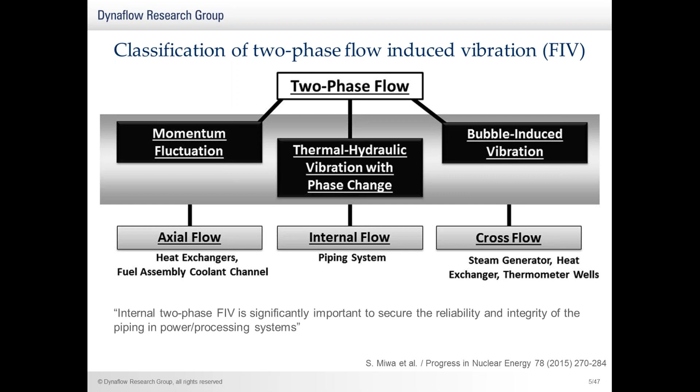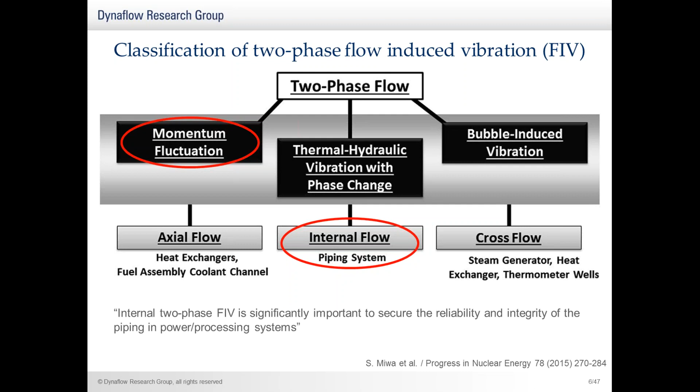process piping systems. Now for the remainder of this presentation, I will focus on these two classes, so momentum fluctuations inside a pipe. That is also, I think, for which we do most of our related projects, but definitely the ones that will be discussed in this webinar. So the remaining content of this webinar is divided in 4 categories. So general characteristics, which is next. Then I will discuss some engineering approaches, so basically what to do and some practical guidelines. One example case, and then I will finish with some closing comments.

So here we see some visualizations of two-phase flow regimes. Basically on the left we see several flow regimes, so stratified smooth flow, stratified wavy flow, then elongated bubble flow, slug flow. I think it's always nice to remind you all that the actual slug is this part. So the red section is a gas pocket, but the actual impact force is due to this section.

Then we have annular flow, wavy annular flow, dispersed bubble flow as the last. And on the right we see a measure for the gas velocity, so the superficial gas velocity, on the vertical axis, and we see the superficial liquid velocity on the horizontal axis. So both are a measure for the gas velocity or the liquid velocity. And we see that these two parameters allow you to classify your flow in one of these flow regimes. And these types of plots are also used by programs that predict or calculate, depending on your input, which type of flow regimes you can expect.

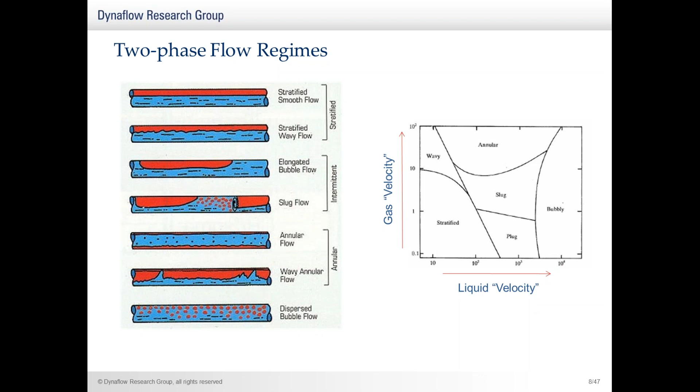So this is another visualization of these flow regimes. On the top we have dispersed bubble flow, and when these small bubbles are grouped together, we can get slug flow depending on the velocities, of course. And again, this is the gas pocket right there, and the actual slug in this case is here.

Alright, then there's also a visualization of annular flow, but I think if you want to know more about these types of classifications, I would recommend to check out the books written by Ove Bratland. Ove Bratland is a researcher and a well-known person in the field of flow assurance. And he wrote 2 books which are free for download on the website shown at the bottom right.

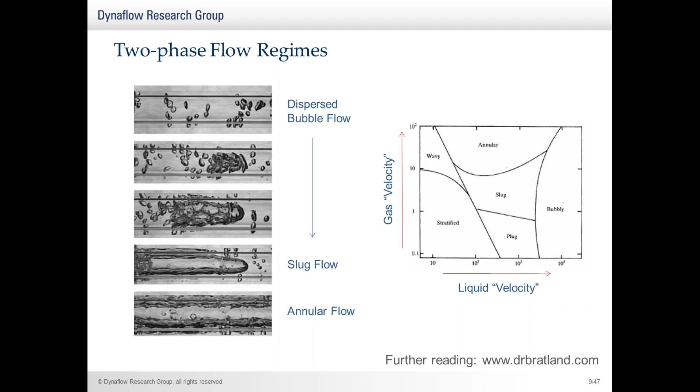And these 2 books, I think especially the second one, focuses on multi-phase flow, and a lot of these topics are discussed in detail in this book.

Okay, so a little bit more on slug flow. So we define 2 types of slug flow formation. The first is terrain slug formation, and that is basically due to elevation differences in the piping, which cause water to be collected at the low points in these piping configurations. And then as soon as the gas pressure builds up at the upstream side, the liquid column is pushed uphill and pushed through your piping system. And then also always some liquid falls back to the bottom and is collected at the bottom again, and basically the whole process starts over again.

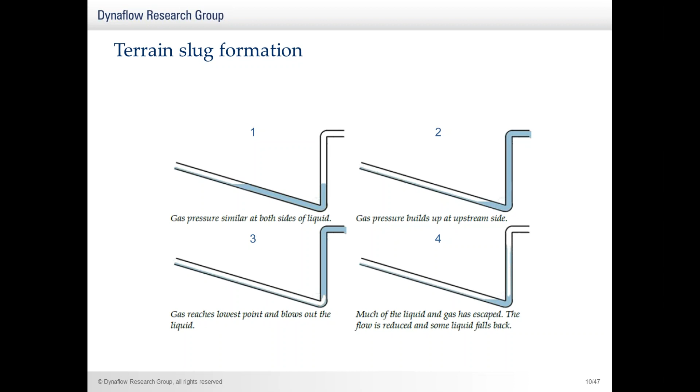Now this is a different process than the second one, hydrodynamic slug flow formation. And this type of slug flow formation mainly happens in horizontal lines. So here we have basically a small wave, which is an unstable surface, and due to the gas flow it grows and can fill the entire cross-section of the piping. So now we have an entire cross-section filled, so basically a slug flowing through the horizontal line.

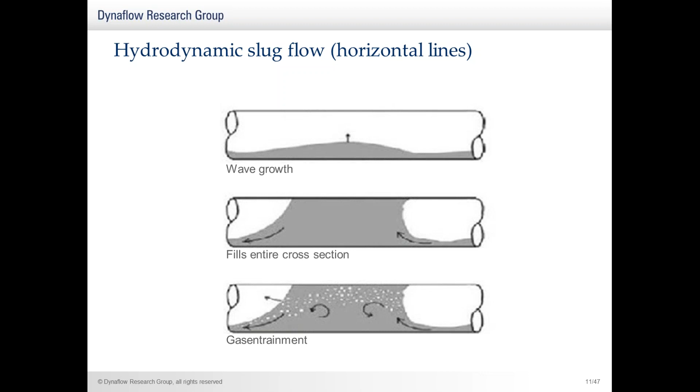Now once we have these slugs, they act on each elbow individually, not only on elbows of course, also on T's or even reducers, and the total impact force exerted by these slugs can be calculated by the mass flow times the velocity, assuming that the slug covers the entire pipe cross-section, which you could say is conservative. So we find the maximum slug force as the mass flow times the velocity, so the density of the fluid times the inner surface of the pipe times the velocity squared.

Now this force builds up as the front of the slug enters the elbow. This is basically the rise time as defined in the graph you see. And then as soon as the entire elbow is filled by the slug, we have the maximum slug force. And as soon as the back of the slug enters the elbow, the force is reduced, and the force becomes zero again as soon as the end of the slug exits the elbow, of course.

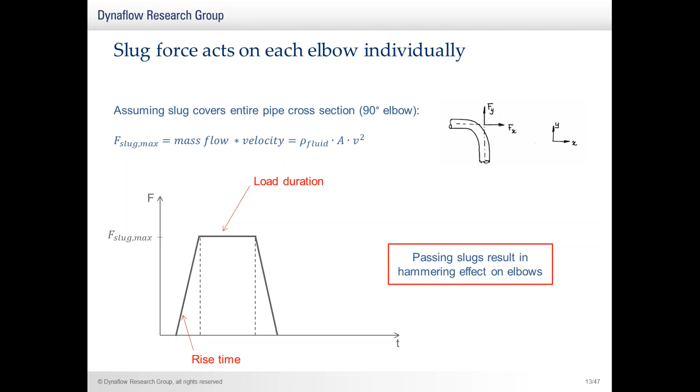Now what we see is basically that passing slugs result in hammering effects on these elbows. So rather short but high force impacts on elbows, which can definitely cause vibrations if these forces aren't absorbed correctly.

Now the difficulty when analyzing this phenomena are the parameters, so the slug velocity, the slug length, and the slug period, because these parameters define the time history in case you want to analyze multiple slugs passing through your system. Typically slugs represent low frequency and high amplitude vibrations, but to obtain these parameters can be quite hard. In some cases we receive it from clients that have done extensive analysis of the flow regime in their system, but often this information is not available in a lot of detail, and estimations have to be made.

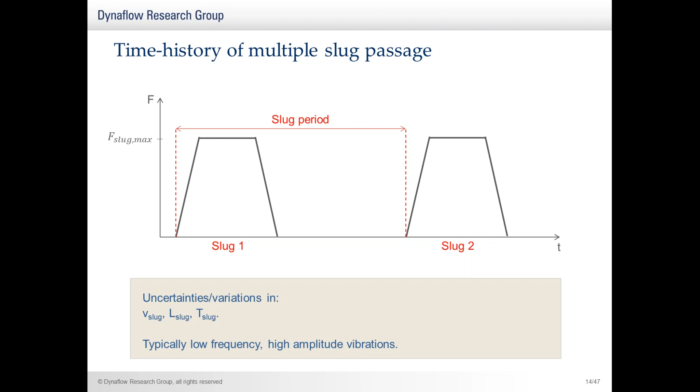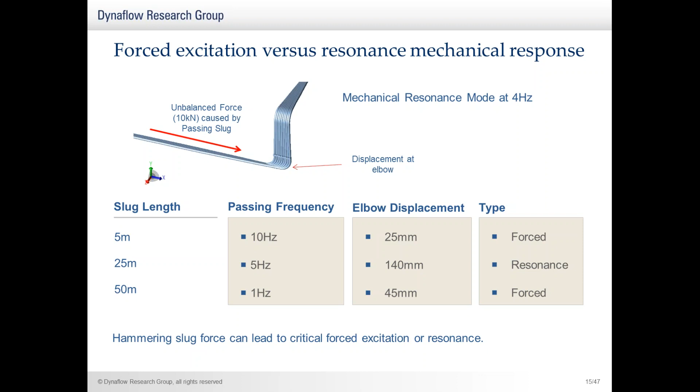And often we relate them to maybe the amounts of volume that are available, or clients do extensive calculations on the type of flow regime that they have. But often also, I mean, you just have to be conservative or vary these values and see what you find, and in which cases there is or is not a problem.

Alright, next I want to talk about some engineering approaches knowing these backgrounds that I've just discussed.

Okay, so how to deal with slugging during the design stage. And I think this holds for not only slugging but also for other two-phase flow regimes. So basically slug flow is quite difficult to predict in the early stage. There are several two-phase flow programs available, and they definitely give some very usable output. But in the end it's always quite hard to see what the actual flow regime is.

However, we know that some systems are more likely to be exposed to slugging. For example, in the upstream sector, risers, well lines, flow to separators, of course, and in the downstream sector, crude furnace sections, distillation tower feed lines, and steam lines. And on the right, you see an image that shows a

burner, and here we see, well, basically on the bottom, if I'm correct, we see the radiant section, and here the convection box. And what happens here is that crude oil is being heated, and then the heated crude oil is being fed to several fixed bed reactors, two of which are displayed in this image.

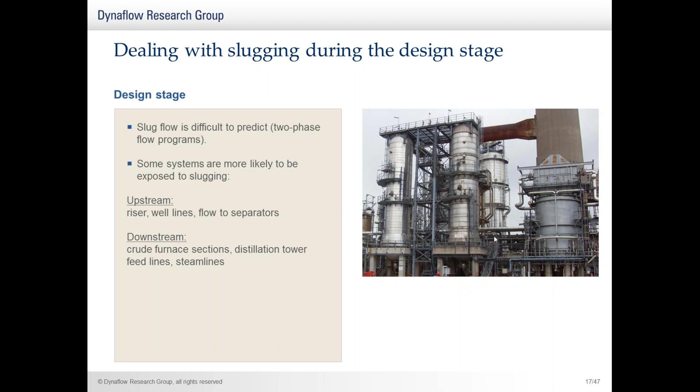Well, first of all, there are some flow charts available. This one is an example from the Energy Institute, and they allow you to take, well, basically a step-by-step approach to estimate the likelihood of failure. I think that's the first assessment.

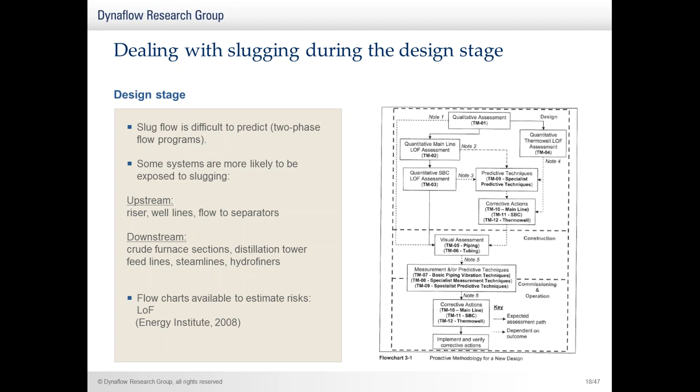Well, some actions I would definitely recommend during the design of such a system would be the removal of low-frequency eigenmodes. So if you remove these frequencies by adding supports, then these supports will most likely be able to absorb the slug forces. Now, of course, this is not enough. I mean, you can remove the low frequency eigenmodes, but you also have to design the supports that you use for the slug loads. So the allowable forces on these supports, including the clamps and the shoes, all have to be sufficient to absorb these impacts.

Avoiding certain routing, avoidance of slugging regime. Well, of course, if you are able to predict it, then you are also most likely able to avoid it. Maybe by using an orifice or something alike, you can tune the flow to a different regime. And well, I think the more advanced step would be to do a detailed mechanical response assessment, but you would have to base them on assumptions instead of measurements. So conservative assumptions, as I just showed you, you'd have to tune the parameters to get conservative results.

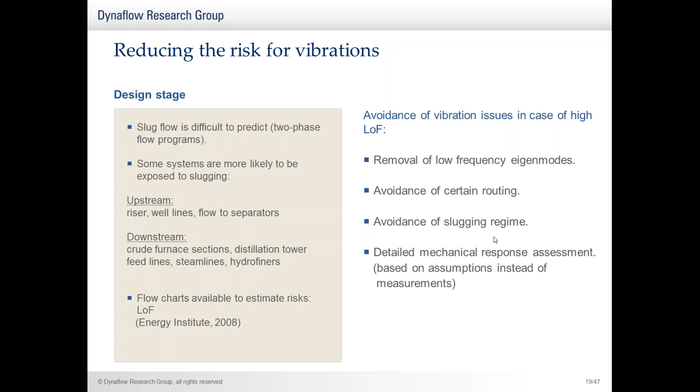How to deal with slugging during the operation stage? Well, this is a typical example of a project that we come across. So vibrations or failure even are observed, and the user, the operator, is alarmed by this. So the first thing that is often done is that measurements are taken, and depending on the outcome of these measurements, a decision is made on whether things have to change or not.

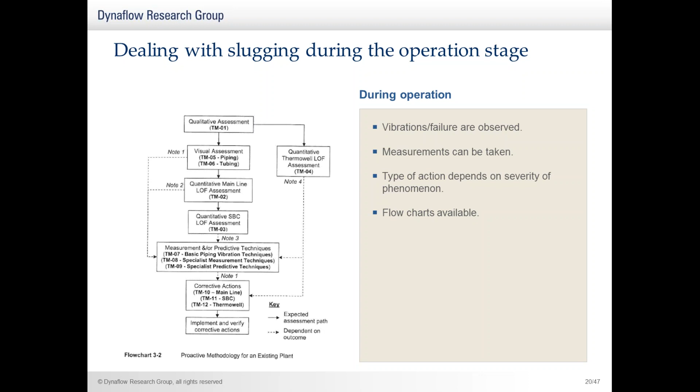Again, flowcharts are available. Again, an example is provided here from the Energy Institute. But the next step, I think, would be to assess measurements. So basically do measurements on these piping systems, and then you have vibration-based limits available such as the VDI 3842, which allow you to make an assessment of the severity of these vibrations.

What you do is basically you measure the acceleration versus time, and you translate this to the velocity versus frequency. And you then plot this value, so the root mean square velocity, in the diagrams provided by the VDI. And the lines provided in this plot on the left bottom give some indication of the severity of your vibration. However, these lines are often considered as quite conservative. Well, basically, there is no information yet used of the geometry of the system. So I think these have to be conservative and are worst-case scenarios.

A different type of vibration-based limits is provided by the Energy Institute. And again, you have a plot available to do some assessments of the vibrations that you have.

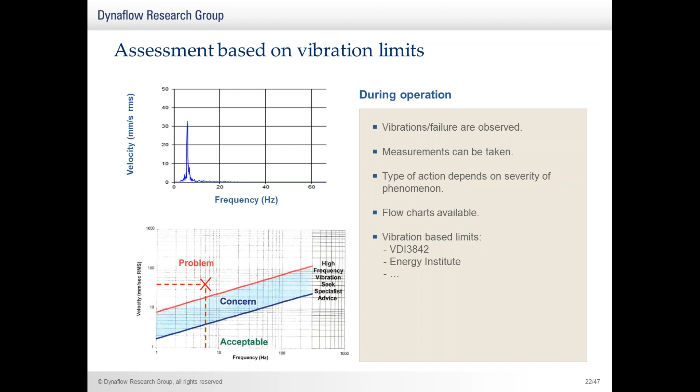In the end, if you want to know in detail what the stresses are of your system, you can always do a detailed mechanical response study based on measurements. By doing so, you are able to calculate the stress caused by vibrations, and use this to assess, for example, the risk for fatigue failure in your line.

Of course, the more advanced you do your study, the more time-consuming and costly it becomes. So often, and I think this is represented in the available flowchart, you start with just making the observation, doing the vibration-based limit check, and then depending on the outcome, decide if a detailed mechanical response study is necessary.

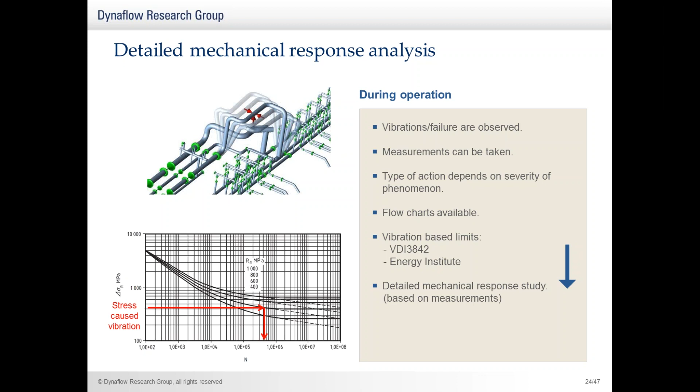What I also want to highlight is that when doing these detailed mechanical response analyses during operation, measurements are a big part of it because they allow for quite accurate inputs into the calculation. And of course, you always run into several practical issues.

Often there's not that much information available, especially if the systems are a bit older. But also when doing these measurements, you really have to have a very close feel for the locations of measurement and the directions in which you want to measure—if scaffolding is provided, if insulation has to be removed, if it's a very high operating temperature, and whether the sensors and equipment are all okay for this.

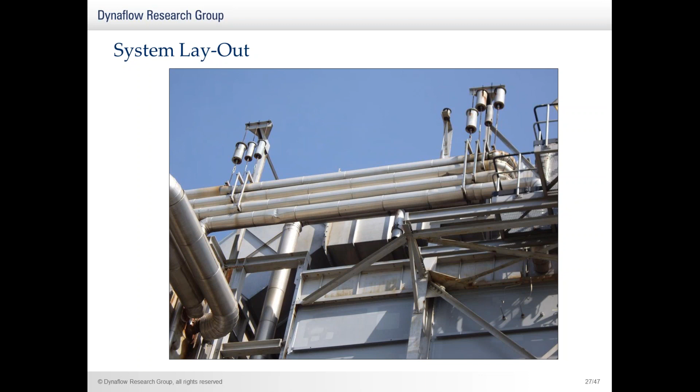One of the solutions used quite often are snubbers. Snubbers allow for slow expansion, slow thermal movement, but they damp very sudden movement. In this case, I think it's clear that this will not add much fixation in case of slugging, since the slug will provide forces in the axial direction at these bends, not in the transversal direction. So I'm not sure what the reason was for installing this specific snubber, but it will not add much to absorb slug impact loads.

I think this really shows a typical engineering issue. If you are designing for a static situation, you really want to provide flexibility to allow for thermal expansion. However, this is the exact opposite of what you'd want for dynamic features, because if you fix the piping better, it's less prone to vibrations. So you always have to find a balance.

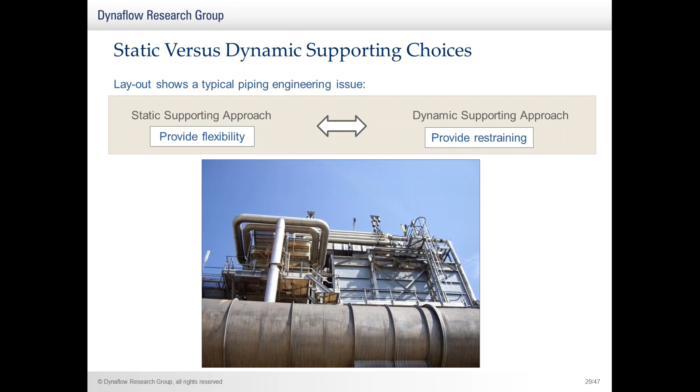I think you can always find this balance if, during the static stress assessment and design, you already take into account what eigenmodes are present in the system. Most stress assessment software have modules for this and allow you to calculate these eigenmodes. Taking this into account for your static assessment and solution already helps a great deal regarding the dynamic solutions.

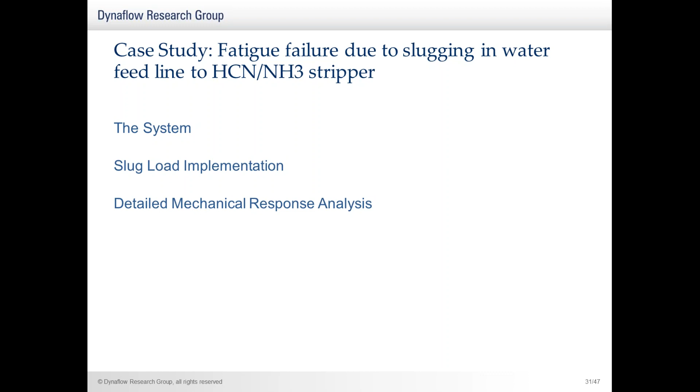Next I want to discuss one example case of a project that I and my colleagues performed. It concerns a fatigue failure observed in a hydrogen cyanide ammonia stripper, in the feed line towards this stripper. I will discuss the system, how we implemented the slug load, and how we performed the detailed mechanical response analysis.

So these images provide an overview of the system. Basically the feed line starts at a heat exchanger and then flows towards the stripper. And I think you can see on the image on the right, the zoom, that there are quite some features that we included in a little bit more detail than we would usually do for a static assessment. You see that I've included some steel structures and also some support attachments on the stripper itself.

And the reason we did this is because it is very important in such dynamic assessments to properly model the eigenmodes, to properly allow calculation of the eigenmodes. And this asks for a little bit more detailed modeling, where you would, for a static analysis, for example, use a friction coefficient that is conservative. For a dynamic analysis, in case you want to properly model your eigenmodes, you would really have to use a very realistic friction coefficient. And that can either be 0.4 or a little bit less or more, depending on the surfaces of the supportings. But you would also have to properly take into account the flexibility of these supportings and really the flexibility in your entire system.

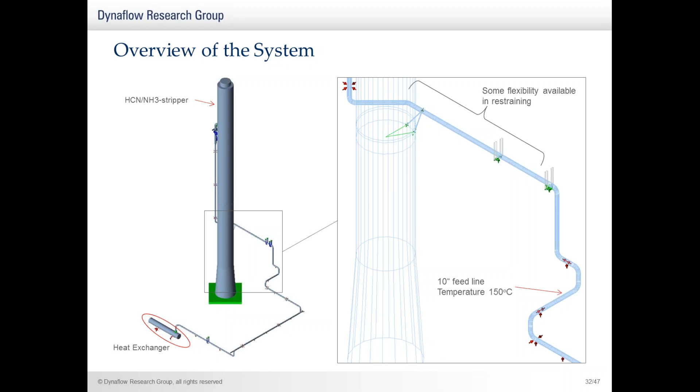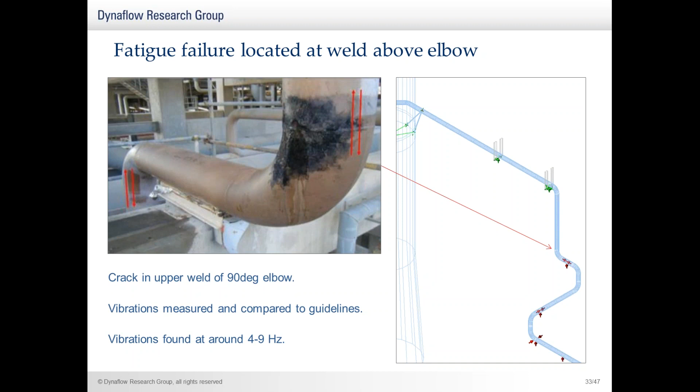In this specific case, there was a fatigue failure located at one of the welds above the elbow, pointed out with the red arrow. Vibrations were measured, and these were compared to the guidelines that I just showed you, the VDI 3842. And from this, it was, well, basically confirmed that these vibrations had to be solved. I think the failure itself says enough. The frequencies of these vibrations were found between 4 and 9 Hertz.

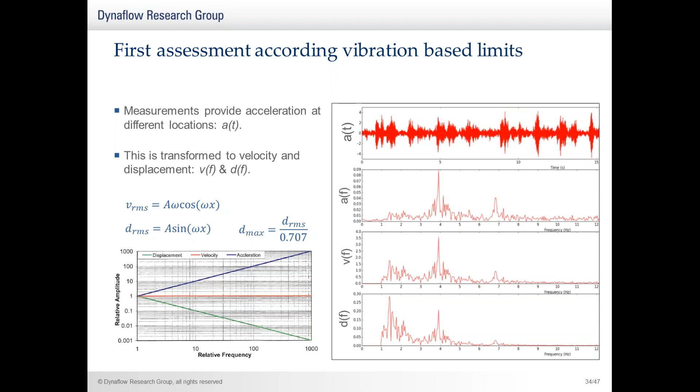So here we have some visualization of the vibration measurements that were done. So the accelerometer provides the acceleration versus time, which can then be transferred to the displacement or the root mean square velocity as a function of frequency. In this case, well, we found several data points which are alarming, and I think this is good because it confirms that these methods really show quite a good image of what is happening, since there was a failure in one of these bends, and maybe these other data points, other locations, and other vibrations could also lead to failures in the near future.

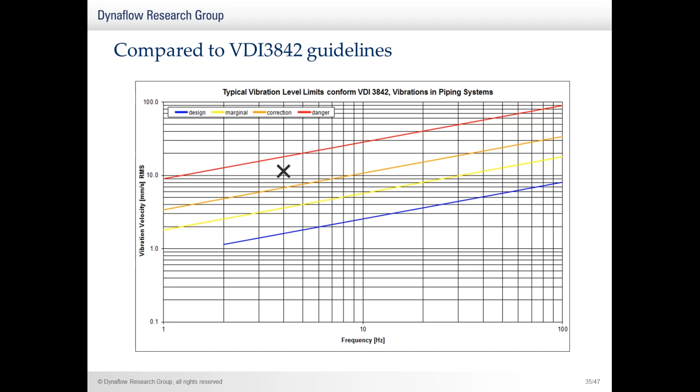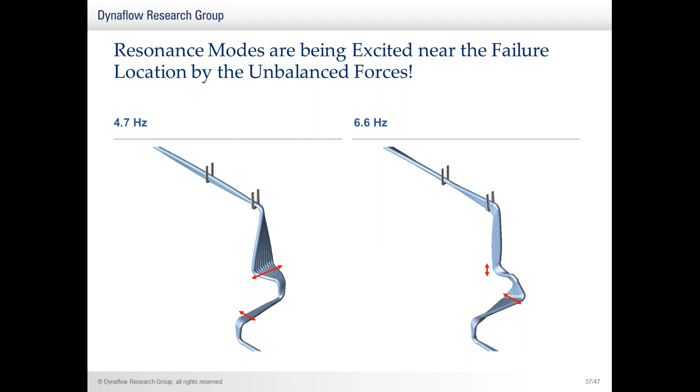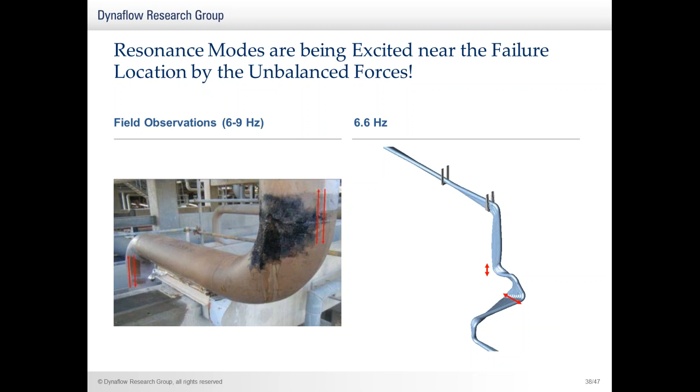And what we found was that resonance modes were indeed being excited near the failure location by these unbalanced forces. So we found one eigenmode at 4.7, one at 6.6 Hertz, and this really matches closely to the field observations, which observed a frequency range of around 6 to 9 Hertz, and also the mode shape that they visualized was quite close to the one that we see. And basically from this calculation, this time history analysis that was performed, the stress amplitude could be obtained for several of the locations, including the failed bend.

And we have to keep in mind that these vibrations, well, they account for a lot of cycles in a relatively short time. So for example, if you find several millions of cycles, if you're cycling at 10 Hertz, that can still definitely become a problem within a realistic time span. So even if your system is normally not operating in the slug flow regime, if you then for some reason operate with slugs for say a week, still, even though it is for this short time period, fatigue problems can arise.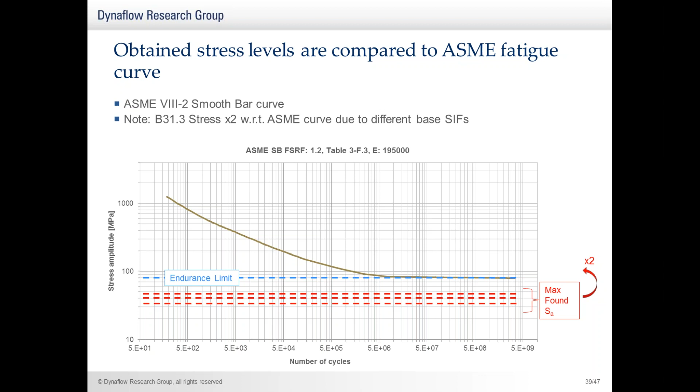Now following from this, the action to take, of course, is to eliminate these low frequency eigenmodes. So restraints were recommended, at several locations and with several functionalities. I want to recommend, you have to keep in mind that you always have to assess the static stress situation again, and also take into account the maximum loads on these restraints.

And in this case, the system was in operation, was not taken out of operation due to this failure, and a clamp with a backing was provided on the leaking elbow. So we included this weight and evaluated the influence it had on the eigenmodes and on the eigenfrequencies, and if the situation was okay both with clamp and without clamp, because the clamp could only be removed during the first shutdown. That would not happen soon.

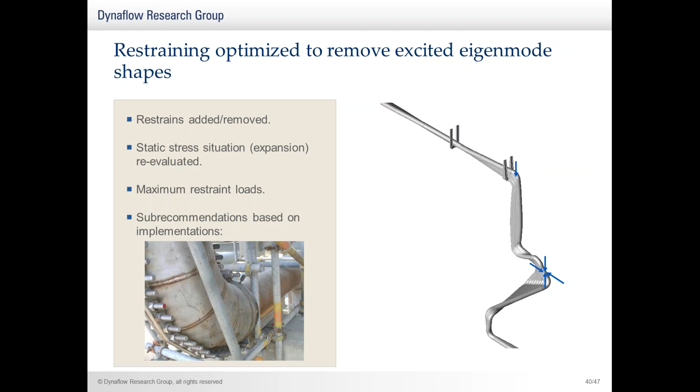So just some examples of what we found during typical projects. And I think something to emphasize is the type of implementation. So it's quite easy to recommend what supporting has to be included. You know, if you do the analysis properly, you can add these supports and eliminate the eigenmodes. But we have to keep in mind that in case of a failure, the supporting is often added

during operation. So also if customers see a vibration and they want to act on it and eliminate it, then they probably want to do it while the system is still in operation. So then the question becomes how to install a support, for example a guide, on a vibrating line. That is always a big issue. So we've had a lot of discussions in the past about fixing the lines, the steel cables, or all these different types of solutions. But that is always a very difficult issue, and there's not really a very straightforward answer to this.

It totally depends on the geometry and the severity of the displacements. But what I think is very important to keep in mind during these issues is that you should not allow for any large gaps for these supports, because especially for these hammering effects, if the piping is not properly connected to the support, then the impact load will not be properly absorbed by the support, and you basically get a hammering of the pipe onto the support, and your support will basically deform over time if it is not very rigid. So you have to definitely keep in mind during any implementation that you allow for a very minimum amount of clearance between the pipe and the support.

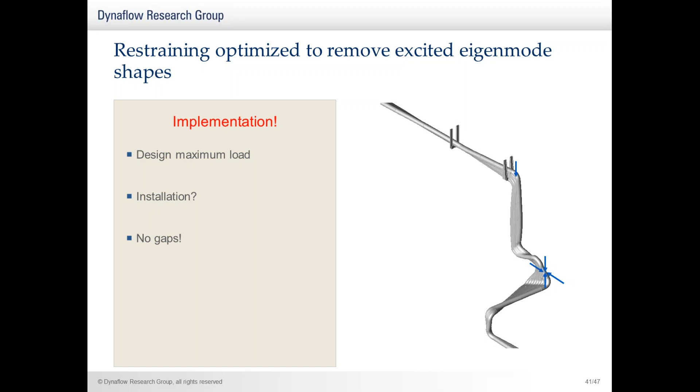Okay, some final comments. So vibration due to two-phase flow. What we've covered are changes in density and then mainly the related impact forces. Often these are low frequency, so say around 10 Hertz, maybe even lower, but high amplitudes. Often these vibrations can be seen with the naked eye. Different approaches are available: guidelines, flowcharts, vibration-based limits, and of course a mechanical response study can be performed.

Typical engineering challenges, well, I've discussed some practical challenges. Obtaining data on the excitation mechanism, so these parameters that we've discussed: slug velocity, slug length, slug period, or the other parameters related to the relevant flow regime. A third challenge is to match the model with these measurements. So taking a quite conservative approach simply isn't enough. You have to take a realistic approach, such that if resonance takes place in the field, in reality, you also find this in your model.

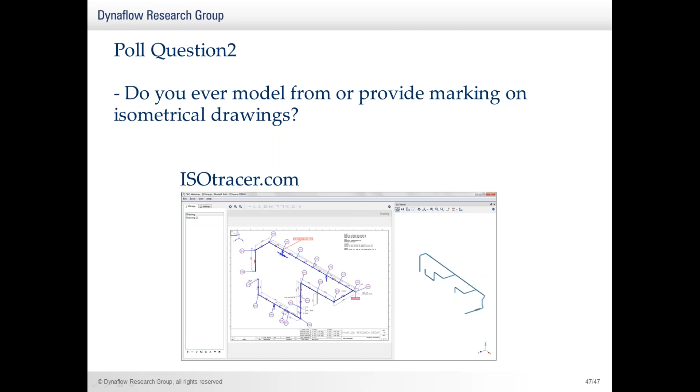Well, basically this will come later on. Let's continue quickly to the final slide. Okay, so thank you very much for listening. And I give the word back to Daniel.

Thanks, thank you Luc for this clear and informative presentation. I see we have received several interesting questions during the webinar. I will start with the first one.

So Luc, when you consider slugs, what's the density that you consider for the slug force? Do you consider the liquid density, or is there a mixed density? Well, that is indeed a very relevant question. The best way to approach it, the most conservative way, is of course the liquid density. In some cases, our clients have done a very extensive, detailed assessment of their flow regime, and they can provide some estimate of the density of slugs, whether a certain amount of bubbles is trapped in it. But I would just recommend using the liquid density. The eigenfrequencies should still be the same, but the displacements that you find will be more severe. So you're basically on the conservative side, maybe over-designing some support for higher forces than they will actually see. But yeah, that's definitely the approach that I often use.

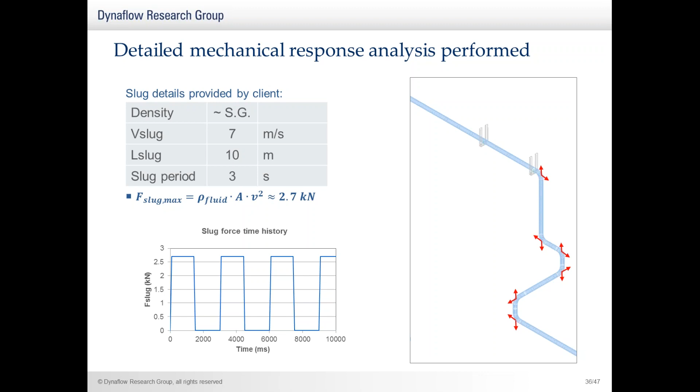Okay, well, thank you, Daniel.

I will now continue with the final part of this webinar, which will take about 5 minutes. It will just be a brief demonstration of the ISOtracer software package that we released. I already pitched the problem that we ran into: it takes a lot of modeling time to go from the isometric to the model, and then you also have to do the marking by hand. We felt that this could all be avoided if we did it in a more effective manner, and that's why we developed ISOtracer.

And we found that even our more experienced CAESAR modelers, once they get acquainted with ISOtracer, which takes about 1 to 2 hours, can reach a much shorter modeling time. So there's definitely a very strong reduction. And I will give a brief demonstration of the software in a minute.

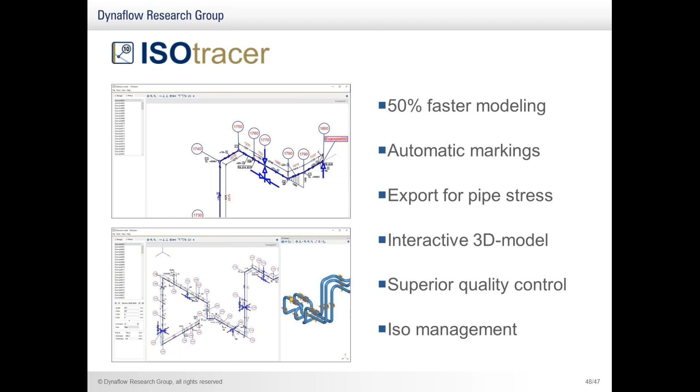Okay, so finishing this, let me show you what the ISOtracer software would look like. What I have here is a prefab example that I have made. Basically, the ISOtracer software package consists of one section in which the drawings are present, one section in which the drawing is visualized, and one section in which your model is visualized. This module is 3D and interactive, as I explained before. If I go to the markup tab, we can see that all the piping nodes are provided here. These can all be changed, but I will demonstrate that simply by starting a new project.

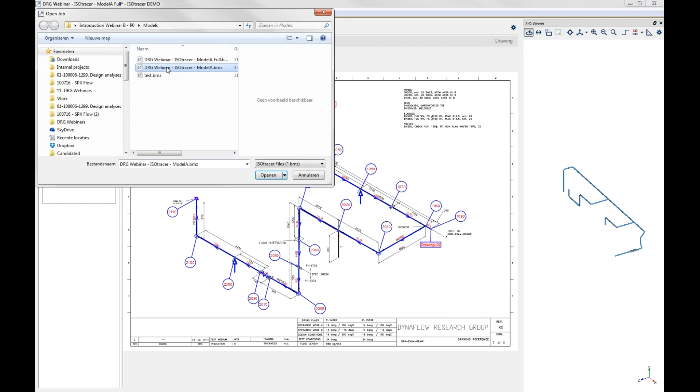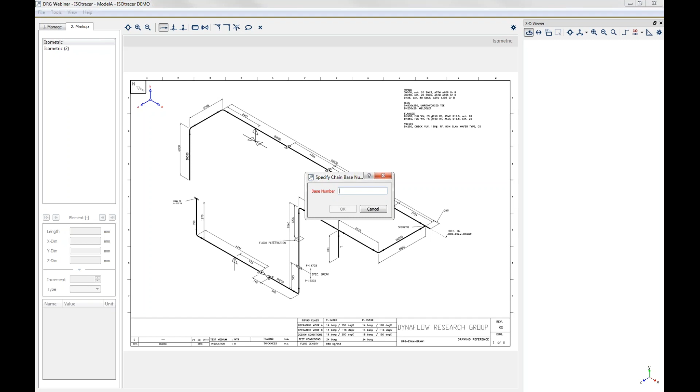Yes, there it is. So here I have two isometrical drawings. This is number 1 and this is number 2. Now I will do a brief modeling of this. I start tracing. I press on the starting node and choose a node number, say 1000. Now we see that I have a red line which follows me. First, let's move this marking. I can now click on the next node location that I want. Now I have to implement the length every time that I click, but since that is the only feature that I have to implement, the modeling goes very quickly.

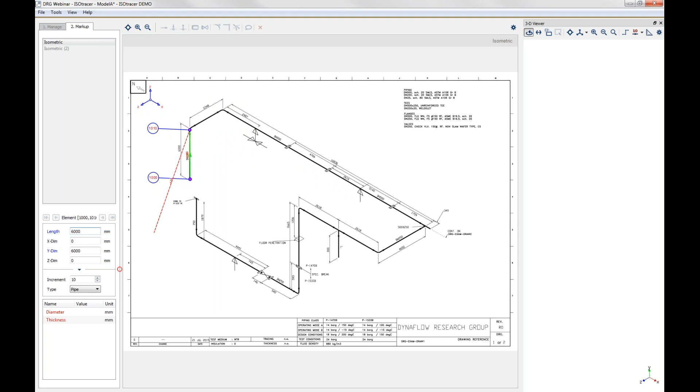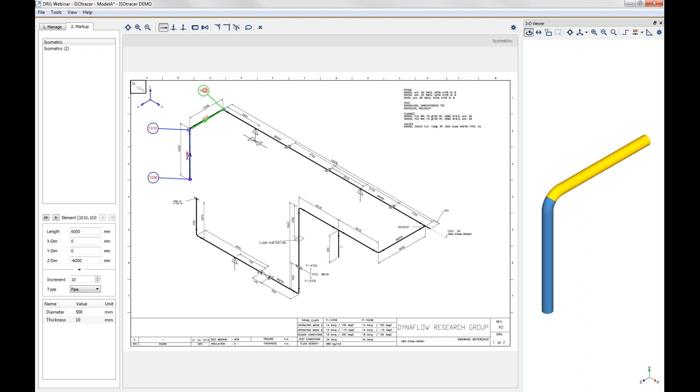Also, the first time you model a pipe section, you have to enter the diameter and thickness. So let's choose some arbitrary values here. Now I think one of the neat parts of this software is that when I click again, I have to implement the length as I mentioned, but you see that the direction that the ISOtracer software package selects for this pipe segment is the correct direction. That is caused by the fact that we have this coordinate system, and we can change the directions of this coordinate system if necessary. But for this isometric, they are all properly defined, as you can see. It uses these coordinate definitions to provide the modeling. So I just want to continue, extend. So this one here.

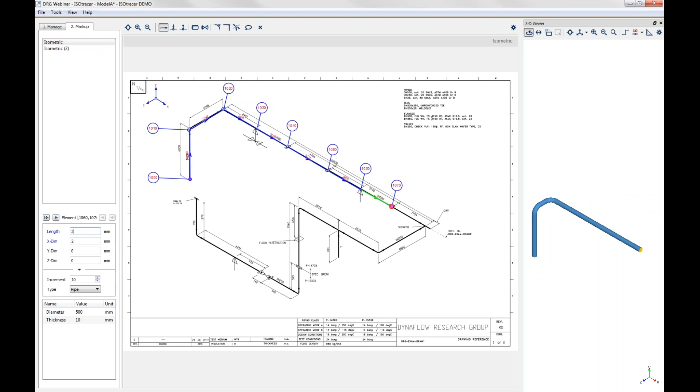I think you can now clearly see that if I just click through my model and implement the length values, you can really quickly build your model and do all the markings at the same time. Now, one of the other neat features is that if I come to the end of an isometric and want to start on the next, I simply select the next one and click on the starting point. It then gives the name of the connected isometric. It again gives the node numbers, and the models are simply connected, and I can simply continue.

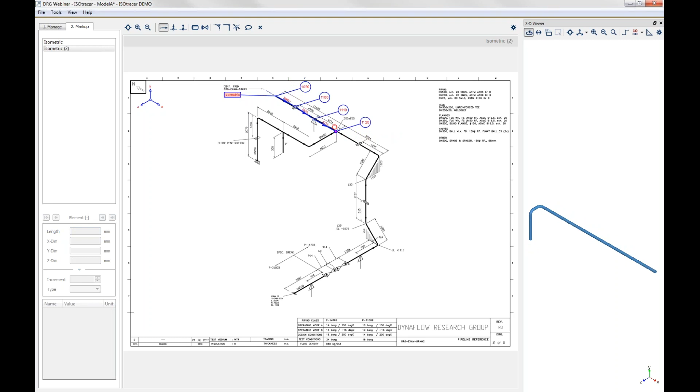So I think that briefly shows you the value of this package. If I just continue for a little while more, even if we have angled sections, the interpretation is very good and it takes the right direction.

So for this section in the isometrical drawing, you see that there are several rigid elements, so valves, and you can just include them. First include them, and you can select, instead of pipe, you can select rigid and include the weight of these rigids. So by doing so, let's include this one as well.

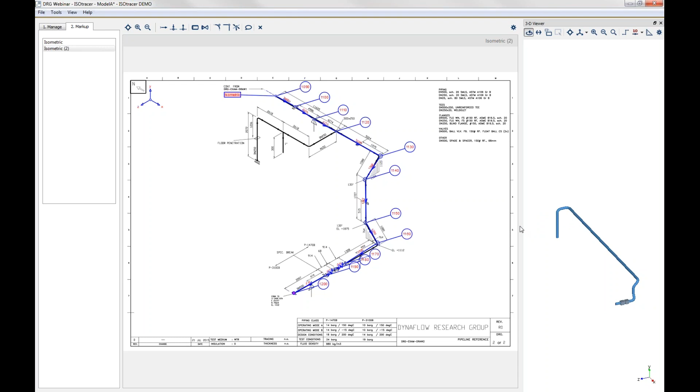And then a pipe section again. Okay, so by doing so, we see that the rigids are already included in the model. By clicking to the relevant location, the software automatically takes the relevant isometric drawing. So that was a quick demonstration of this line segment.

You can also do T's and branches, of course. It's all fine-tuned for easy use. So let's say 2000 for this branch, and we simply start clicking. We have to implement the length. That's the only value in most cases you have to provide. That's a typo from my end.

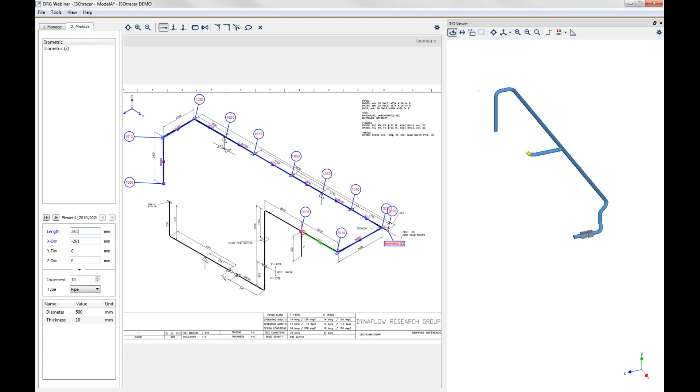Okay, so I think it's clear that all these steps, if you want to go quickly through these isometrics, really allow you to just click through these pipelines and build your model. One of the many features that you can provide are supports. So if you want to add a new support, say for example a rest support, so Y support in the positive direction, let's use a friction coefficient of 0.3. We can simply select the node and we see that the support is automatically generated.

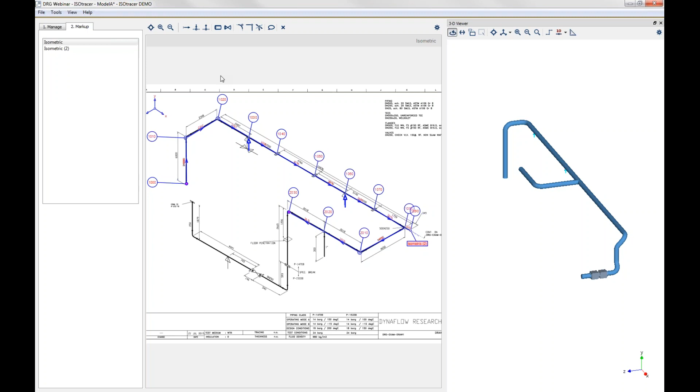All this information that is built up in this file can be opened in, for example, CAESAR II as well. So if I just go to Caesar, one minute please. So if I go to Caesar, this is the model that I started my presentation with.

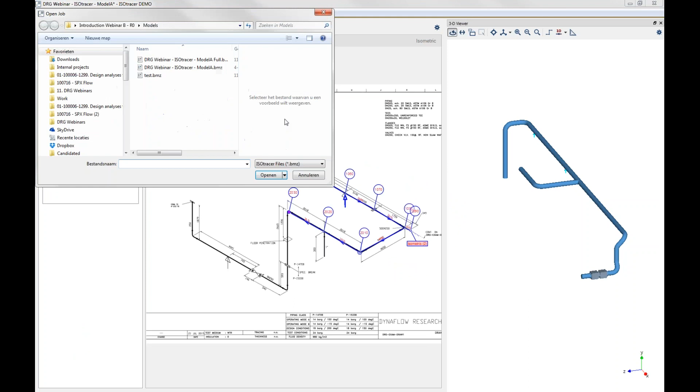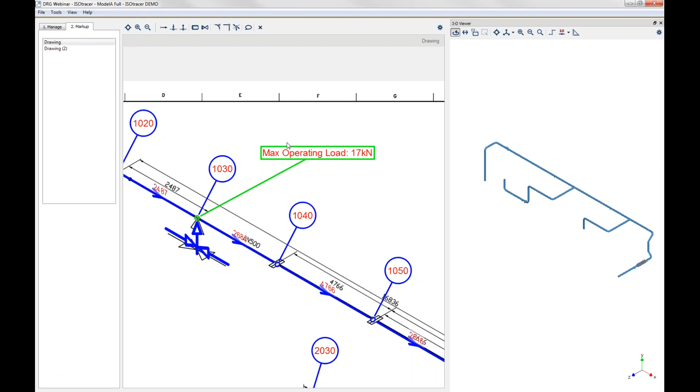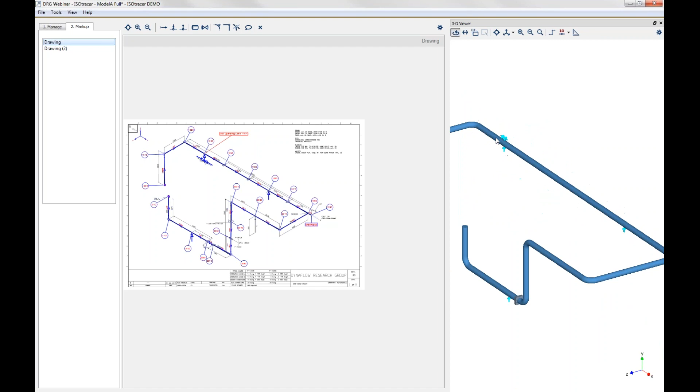So the full model. You see, I took a little bit more time to define all the support types, all the elements, all the rigids. I even defined some markings, some textual markings, which is also possible in ISOtracer. So these are really a set of isometrical drawings that can be included in reporting. We see the entire system, the 3D model as well, including all the supporting directions. And this one was exported to CAESAR II to find the following.

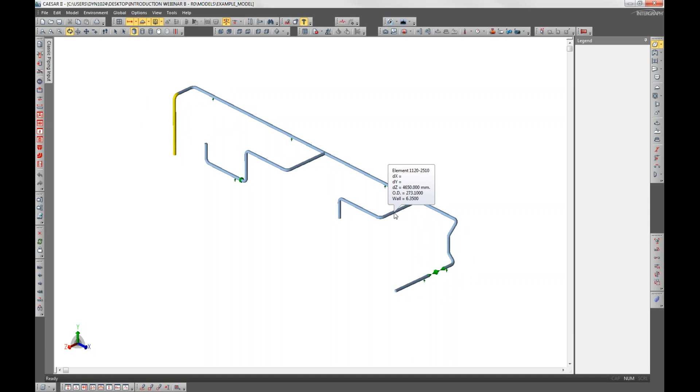So basically you export a file which you can open in CAESAR II, and you then find your model being available here, including the right weights of your rigids, including the right dimensions, thickness, diameters. And basically you just have to define your material, and then you can start analyzing, and of course your load conditions. The next versions of ISOtracer will probably include more of these features, so that you can even define the material in the software package ISOtracer.

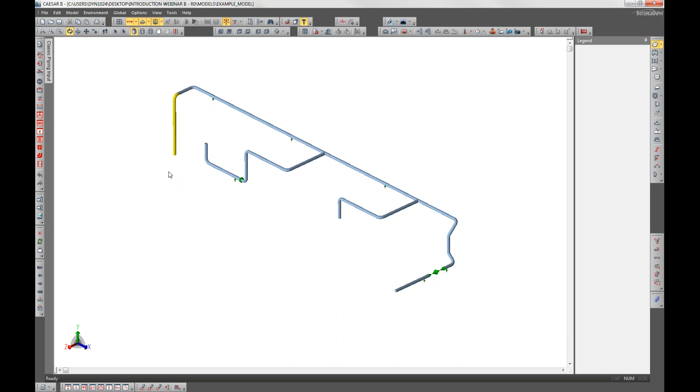But for now, it is a really neat tool to go from an isometrical drawing to a stress model in one step. By doing so, you eliminate the step where you have to provide markings on these drawings by hand, and I think that is also one very big time saver. So a lot more features are available. The software, for example, automatically selects if something is a bend or not. You can also toggle that on or off.

You have something that we call chains in these models. If you start one modeling direction, one pipe segment, and then you define a second, for example a branch, then that is defined as a separate chain. You can see those in the chain monitor, because these node numbers are not allowed to overlap, of course, because then your stress software package would interpret that as the same node. So we have a lot of these features. I think it's really neat to just have a look at this.